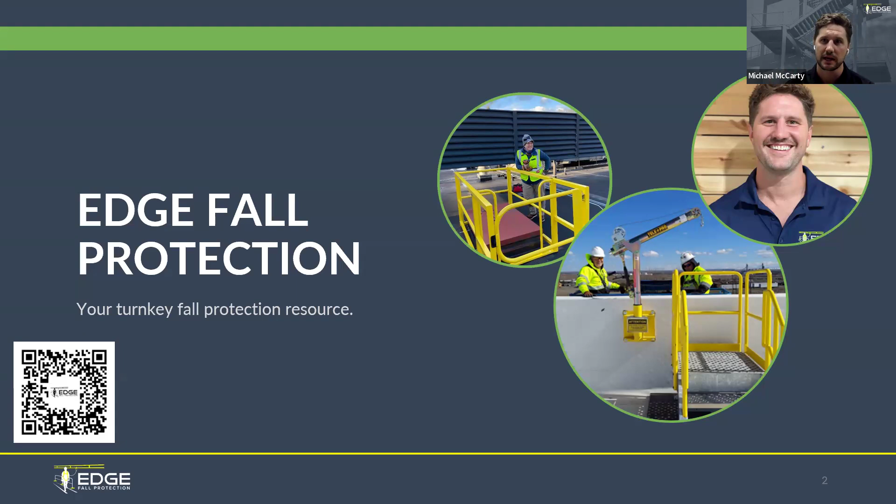So for today's agenda, just going to talk about regulating agencies briefly, get us all started on the same square, ladder code updates, ladder safety challenges, what we're seeing in the industry, practical compliance solutions, and then that Q&A.

So starting with important safety codes, we really have two regulating agencies that we're working with. We have OSHA, which is run by the Department of Labor. OSHA is the governing body that enforces regulations to keep workers safe. That's in contrast to ANSI, which is a nonprofit organization. It's really a North American standard.

And these are really people from the industry, people like myself and other manufacturers, integrators, fall protection experts, who are taking the OSHA standards regulations and applying them in practice and creating a couple other voluntary safety standards and protocols to make sure that what OSHA says can be applied in best practice.

As far as the two regulations that guide fall protection, we are looking at OSHA 1910 subpart D. So 1910 is the subpart of OSHA that requires employers to provide fall protection to all employees exposed to fall hazards. The other piece of OSHA that's not listed here, OSHA 1926, same fall protection requirement to protect employees who are exposed to fall hazards, but 1926 is specific for construction, where 1910 is general industry. We'll focus on 1910 today, but just wanted to inform you there's another one out there as well.

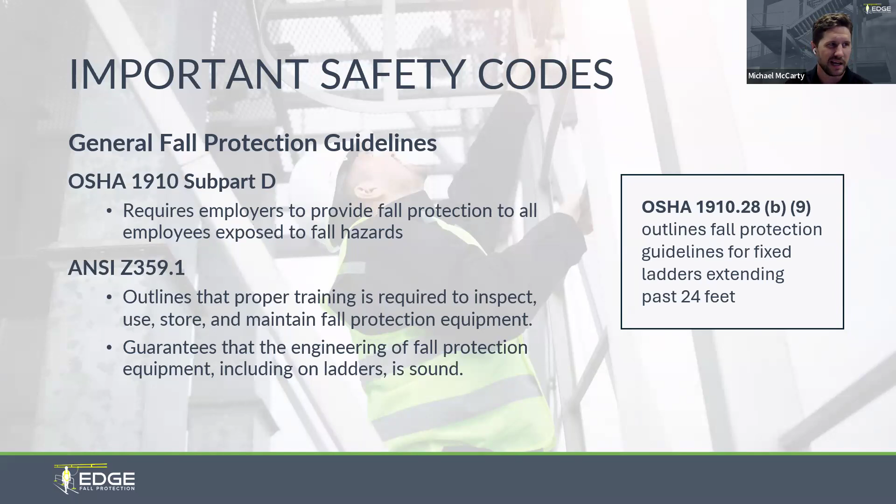ANSI Z359 outlines the proper training required to inspect, use, store, and maintain fall protection equipment. It also guarantees that engineering of fall protection equipment, including on ladders, is safe and sound. More specifically, we'll get to that in a second.

So ladder code updates. I do have a question for each of you. There should be a survey that pops up for y'all. But what type of fall protection do the fixed ladders at your work site use? So a couple options here. Personal fall arrest system, abbreviated as PFAS, cages, probably the most common out there. Don't have ladders where you work, or we have ladders but don't use any sort of fall protection. I'm going to take just a few minutes to get some feedback there.

We have only one person here that has personal fall arrest systems, so PFAS systems. Some using cages, some don't have any ladders at all, and then some having ladders without fall protection. So hopefully we can address pretty much all of these people.

All right, so updates: OSHA 1910.28. So as of November 19th, 2018, cages are no longer considered an adequate form of fall protection. So prior to this rule, any ladder that was over 20 feet required a cage. And then we need a rest platform every 30 feet.

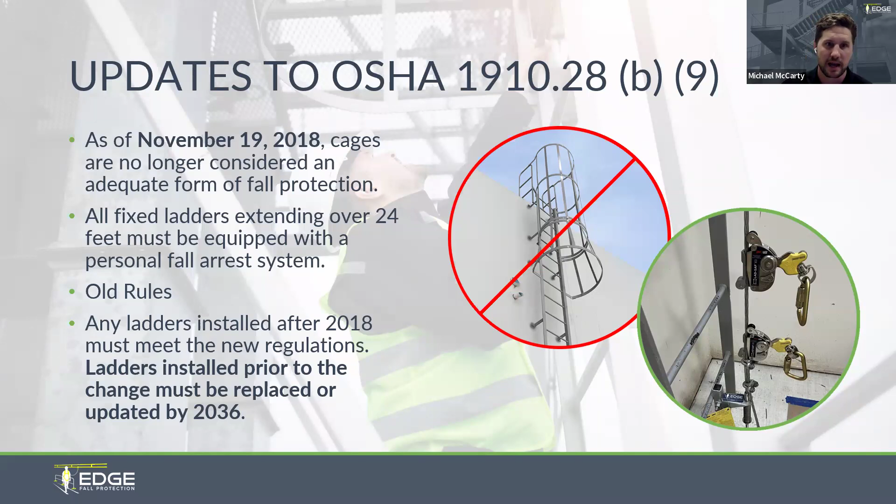So just as a timeline here to reiterate what I just said, pre-2017, cages are considered compliant. That's the standard practice. The thing is that OSHA looked at all of the data and said, hey, these cages are providing a false sense of security. They don't effectively prevent falls.

What happens is a user may slip, trip, or fall down a ladder, and then they're kind of getting banged up in the cage on the way down, and then they still hit the ground. So they aren't stopping the falls. They aren't preventing the falls. They're still injuring employees. So what they did is the 2017 updates, that final ruling, 1910 Subpart D. Again, as I mentioned before, any new ladders over 24 feet require personal fall arrest systems.

I've reviewed a ton of specifications, a ton of drawings over the last many years that are still including cages. So there's kind of a vacuum of information and practice where architects and engineers just don't quite know that any of these ladders over 24 feet need fall protection, not those cages. So we still get requested to build those quite often.

And then the deadline to implement this is November 18th, 2036. All fixed ladders need to be transitioned to the personal fall arrest system. So we have 11 years here to make sure that any ladder over 24 feet has some sort of personal fall arrest system on it.

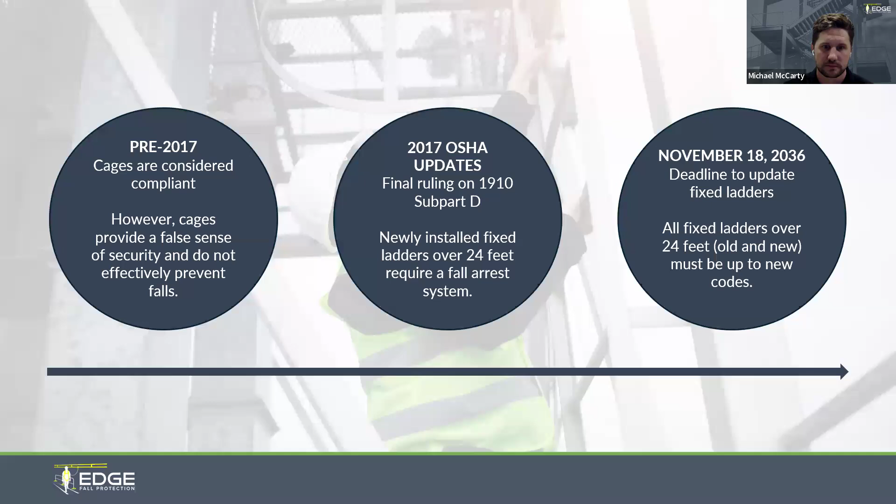So I kind of alluded to this, but the question we have here is, have you or someone you know experienced a ladder-related injury? Just provide a few seconds here. Okay, so some people on this webinar have personally experienced a ladder-related injury. 36% know someone who has, and about half don't know anyone that's had an injury yet. And hopefully it stays that way.

So just some quick numbers for you. Ladders are dangerous. When I'm communicating with people on sites or on the phone or whatever, I'm always emphasizing that your transition points on the roof, off the roof, on the platform, on the mezzanine, and off, those are your most dangerous locations.

So it is easy to slip or have your hand slide or not be wearing gloves when you should, and the steel that you hold on to with the ladder has some sort of abrasions, and you release and you fall. So roof hatches, ladders, anywhere where you're very exposed to heights, are places where you really need to be particularly careful to make sure that you don't fall.

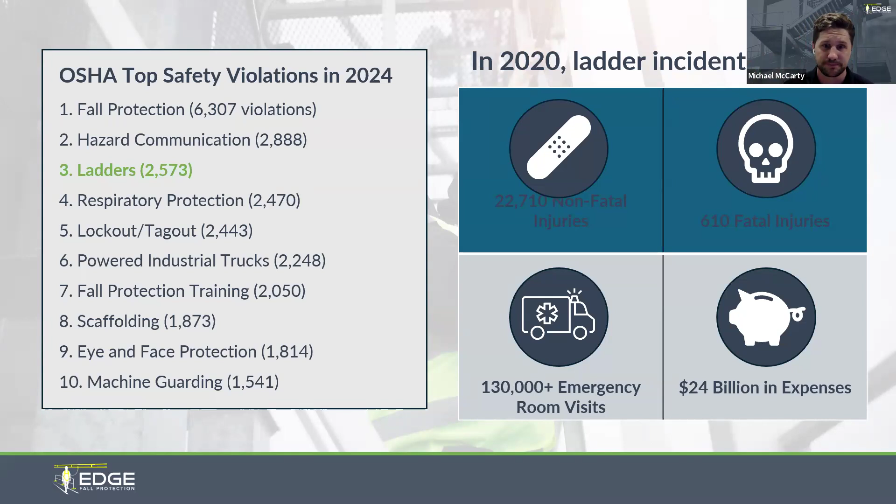Moving on to practical solutions, there are a number of different ways to implement a personal fall arrest system. What is a personal fall arrest system? If I haven't touched on this, it's a system an employer uses to provide protection from falling or to safely arrest an employee's fall if one should occur. So any personal fall arrest system includes three components. It has an anchorage, it has body wear, which is a harness, and then it has a connector. That connector is usually a lanyard, typically a lanyard. Three main types that we use.

Self-retracting lanyards. So we can install, engineer a davit crane or some sort of hanging piece of steel above a ladder. And then a user would pull the snap hook from the SRL down, clip up to their dorsal D-ring, and then they can ascend and descend the ladder hands-free. A rail-based system, so that is usually a continuous run. That's going to be mounted to the rungs of the ladder. It's going to be a continuous run up and down the ladder.

Anytime you're climbing up and down these rail-based systems or a vertical lifeline system, you're going to need a chest D-ring on your harness. So almost every harness has a dorsal D-ring. Many of them do not have a chest D-ring. So if you're looking at these different systems, make sure you're also updating your body wear or harness to make sure that people can actually use the systems that you install.

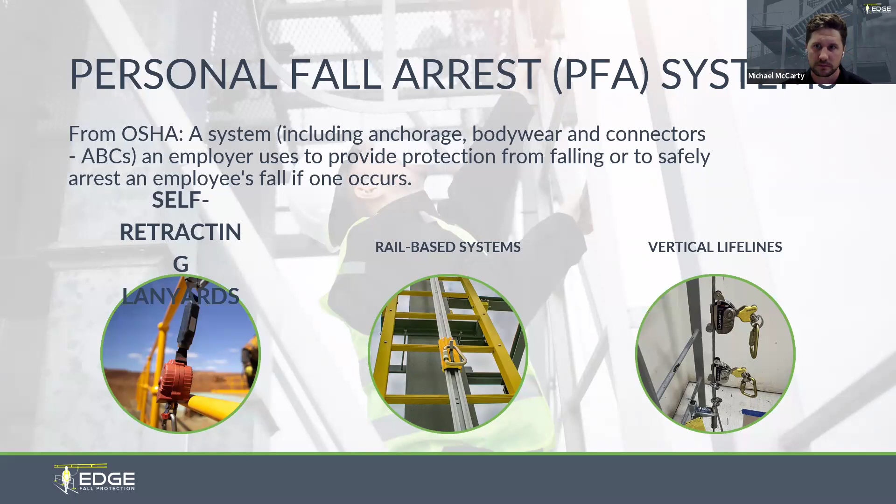So additional considerations for personal fall arrest. Anchor points. This is probably the single biggest thing that is being overlooked when I have conversations with architects and engineers is that when we are thinking about this anchor point, which is our vertical lifeline system, our rail-based system, or the davit that is overhead that connects to the SRL, we have to think about where those loads go. So we have a vertical lifeline on the ladder. A fall occurs. So that load is going to transfer to the rungs. It's going to transfer to the stringers, and then it's going to transfer to the structure.

So how is that ladder attached to the structure? How is it attached to the substrate underneath? Is it bolted, welded? Is it tek screwed into some aluminum studs? Some of these are going to be robust enough to absorb those loads. Some of these are not. So make sure that whatever fall protection provider you use, you get a comprehensive solution built and in place here, because you don't really want to buy a product right off the shelf and just install it without verifying that your structure, your ladder, can absorb the loads in the event of a fall.

We do the engineering. Again, we do the design. So we can help here. Generally, in my experience, it's best if you get an engineer of record involved in any sort of structural analysis that you're doing. Our engineers can always provide that information to the engineer of record, but usually it's most cost advantageous to have the engineer of record actually sign off on the loads that may be transferred into your building envelope.

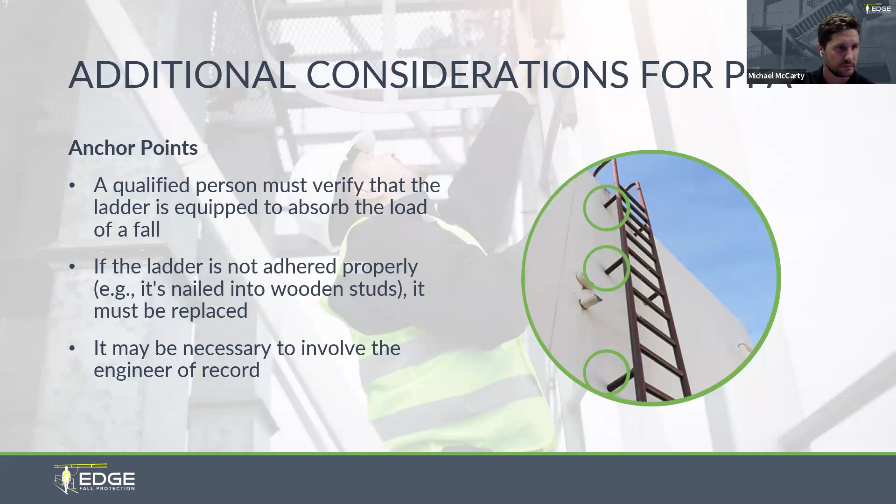So personal fall arrest pros: we do have multiple options, it can be added to pre-existing ladders, and it definitely provides a lot of mobility for workers. So it is a hands-free option. Cons: it definitely requires additional training. This is a new system that's being rolled out across the country. And again, we have 11 years to comply with this. The sooner you can do it, the better, so you can get your people trained up and get the processes in place. Another con: it requires additional time for inspection and application of safety gear. So if you have a ladder over 24 feet, you're now kind of forced to use active fall protection, this personal fall arrest system.

Whereas before, maybe you didn't need to use a harness in your workplace. And that can be a really good practice in a lot of applications if people don't have to use active fall protection. Another con, the ladder might need to be replaced if it can't support the load of the fall. So that's a reality that we need to look at and think about that says, hey, yeah, we can do the design, we can analyze the structure, but it might be a no, and we might have to get a new ladder or transfer to a different system.

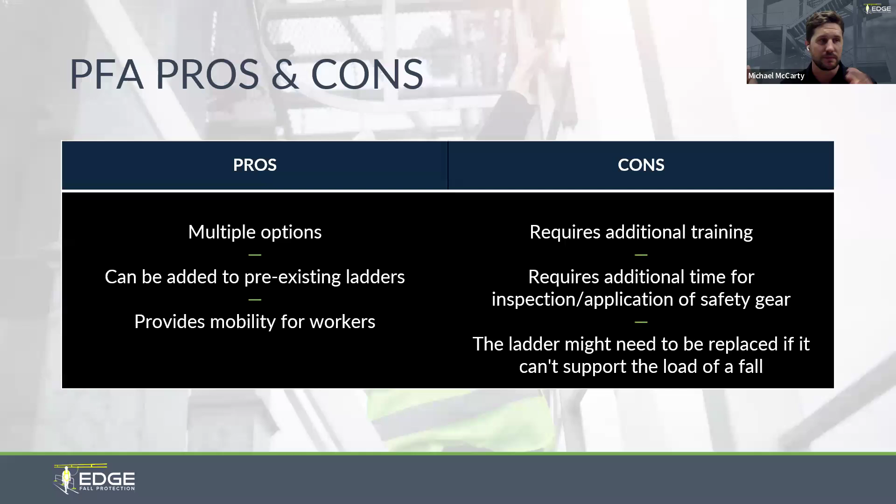So this kind of dovetails into this next thing that we can do. We can switch to stairs. So we can get rid of ladders and we can switch to stairs. A lot of benefits here. It's going to increase safety and stability, better load carrying capabilities, reduce worker fatigue, improve accessibility, easy egress in emergency situations. It is not cheaper by any means.

Switching to stairs is almost always going to require some engineering, and it's going to be more expensive because it's more steel. Maybe we're adding concrete or adding some sort of maintenance pad that we need to do. It's just a lot more robust. But I think one of the other big benefits of a stair, besides we don't have to use an active fall protection scenario, is if you have an environment where you need quick egress from your structure.

Think about a food and bev facility that has ammonia pipelines and you have a leak up there. You want people coming down from that elevated surface as quickly as possible, as opposed to transitioning from the roof level at the highest to the second highest to the third highest to the ground. That can take a minute if we have to use any sort of personal fall arrest system.

The other thing here that we talk about a lot at Edge is just the hierarchy of fall protection, how we should think about fall protection. Number one, we should eliminate the hazard if at all possible. And number two, we try to use passive fall protection, so guardrail, stairs. This is more advantageous, more effective than fall arrest or fall restraint, and a personal fall arrest system is a fall arrest scenario. So staying in the top two brackets of that is always going to be better for the user and the employee.

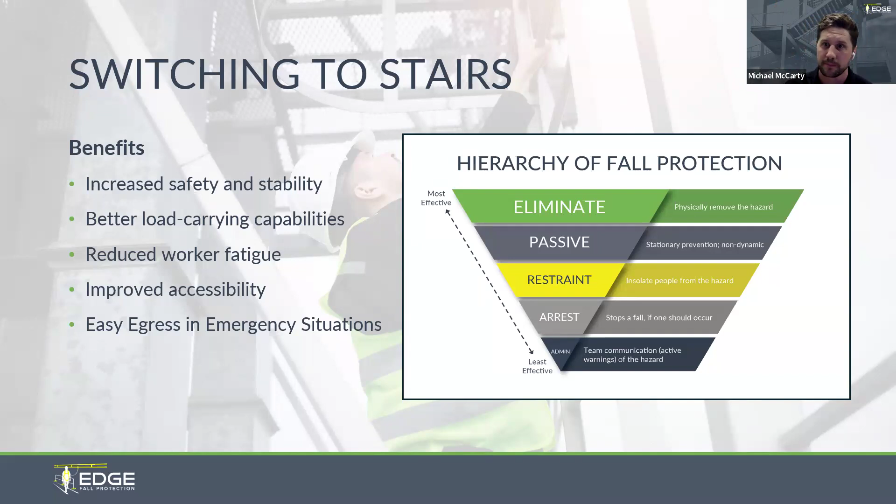This is just a quick slide covering the OSHA design and installation requirements of stairs. So they're all going to have guardrails. They're going to meet the standards that they need to meet. It does need to bear at least 5 times the live load.

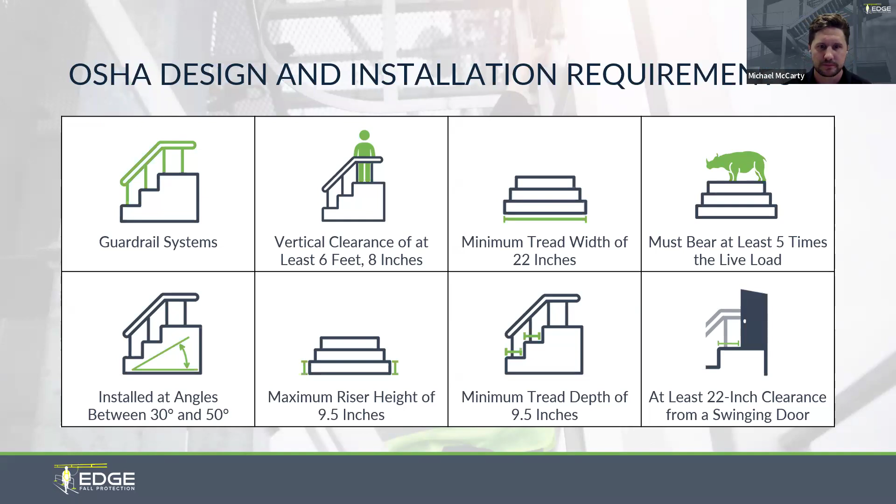Again, pros and cons. Pros: easier to use, require little to no training. You could look at the long-term economic benefits, less OSHA violations cited, less risk of an injury or settlements. Maybe your insurance premiums go down. I mean, the biggest pro is that it's a lot less likely that you're going to have an injury.

And then some of the cons, it definitely requires a lot more space than ladders. So it's just not practical in a lot of situations. And as I mentioned before, it's a much greater initial investment than adding a personal fall arrest system to existing ladders.